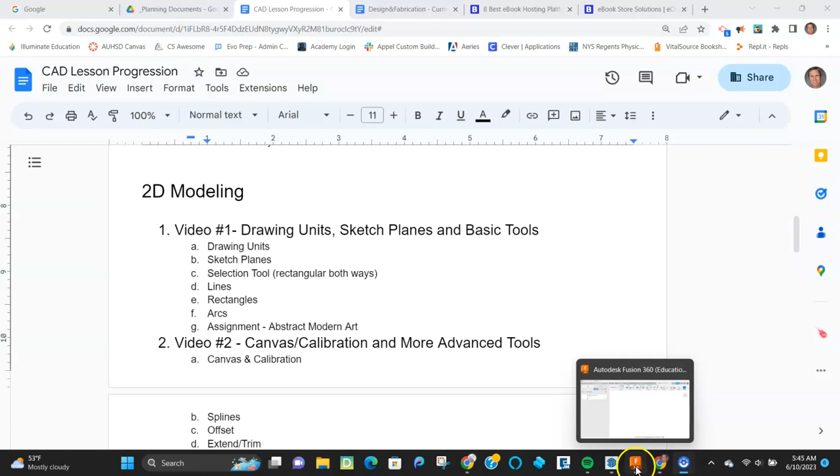All right, this video is going to go through the basics of drafting in two-dimensional sketches with Fusion 360.

One of the first things you're going to do is make sure you've checked your units. You can see that over on the left-hand side. You can toggle them between whatever you want, and change them at different times, but it's a good idea to have them in the units you want to start with. So I'm in my design space with my units, and I have the ability to adjust them now or later if I want. For the most part, we'll be working in inches or feet.

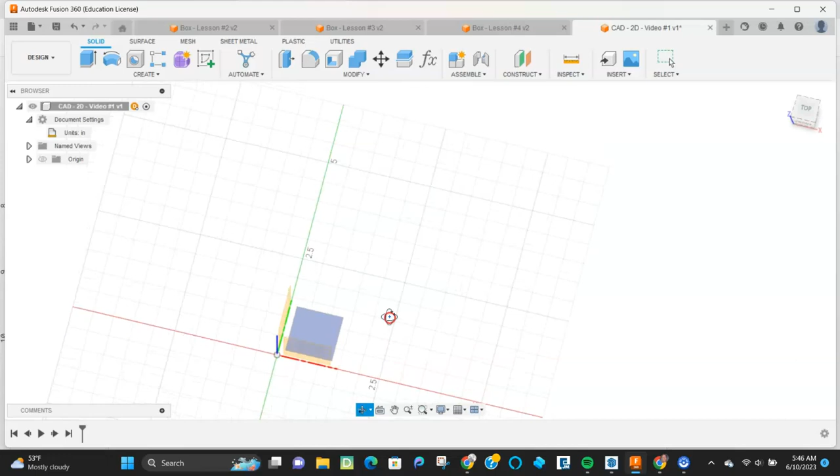Now what I want to do is actually create a sketch. I need to determine which plane I want my sketch to live on. I'm going to select the plane that pops up, and Fusion will orient my screen to a top-down view on that plane.

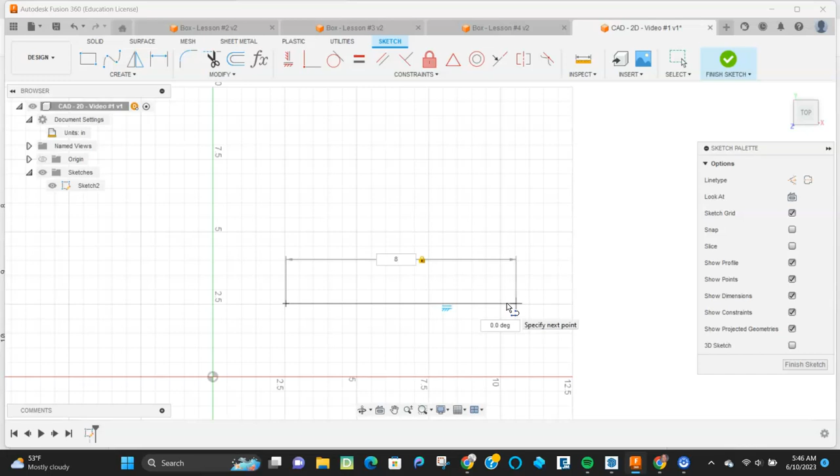So I'm going to start by creating a simple line. You can see as I pick a starting point, I can drag out and rotate up. I can also specify a distance by typing it in, and specify a degree by hitting tab and typing that in as well. That's an easy way to start with basic line work by clicking and dragging, and if you want to specify distances, you can do that too. So I have a line that's 8 inches long and parallel to my bottom axis.

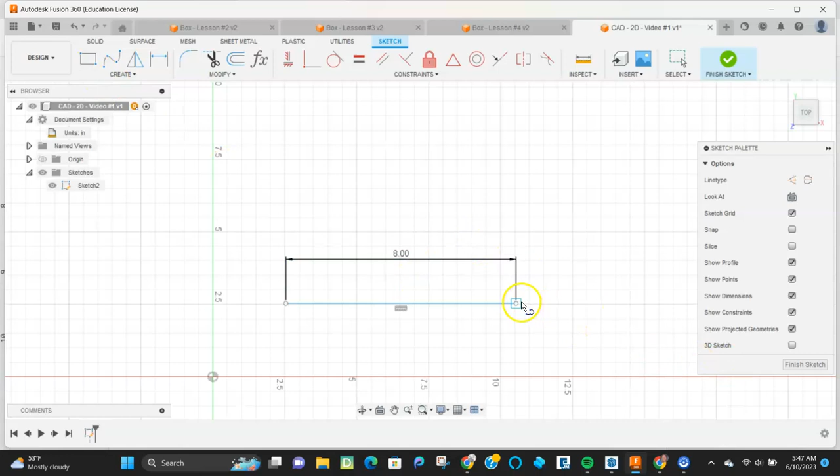I can create another line, make the distance that I want, and change the angle. So now if I have 45 degrees, it'll lock in that dimension or angle, and then I can drag out or type in the number that I want.

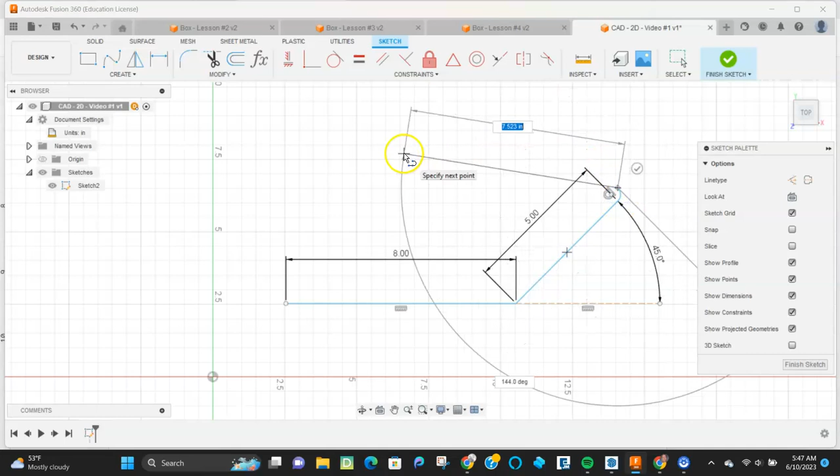So I have two lines now that are joined together. I can add more lines and make really any shape I want just using a simple line tool. You'll see it snaps to the endpoint of that first line, that's important if you want those to be joined. You want that little square to show up, which shows it will actually join those lines at the same point when you put them together.

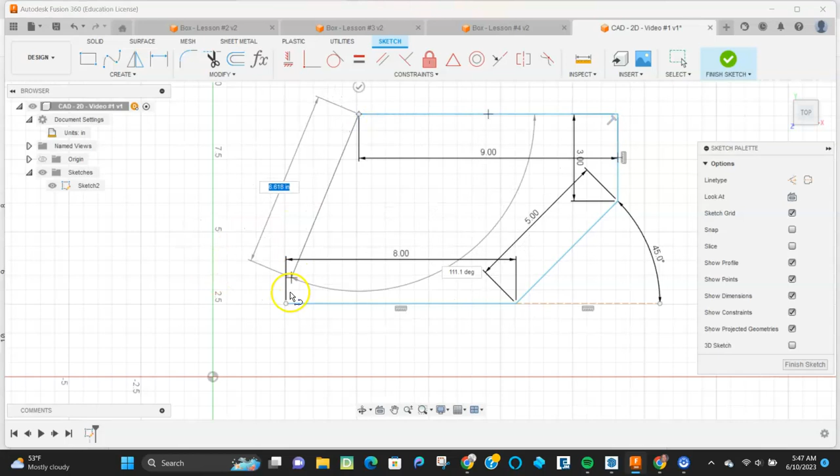So just finishing up my rough sketch here. There's no real rhyme or reason to what I'm drawing, I'm just looking at how I can make different lines in different spaces. As I hover over spots, I have a midpoint shown by a dotted line, and an endpoint. If I hover over it and then move, I'll be able to snap things to midpoints or endpoints pretty easily.

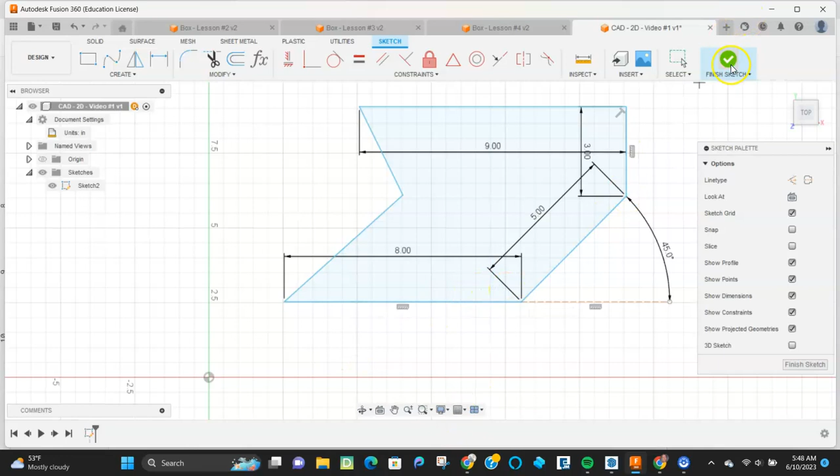Once I've completed and closed the shape, you can see that it shades it in, and then I hit Finish Sketch, and I can see that my sketch showed up there as Sketch 2. I can toggle the eyeballs to show or not show it down the left side.

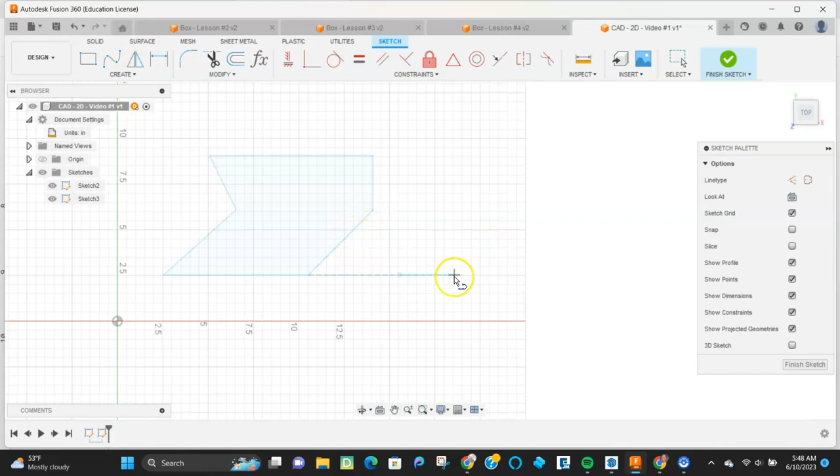I can make another sketch. I'm going to click the same sketch plane and move over a little bit to get myself more room. I'm going to do something similar where I make a shape, but specify the dimensions after the fact. You can see as I hover over my first shape, it'll start to draw lines to make things collinear to an endpoint or midpoint. So I'm just roughing out the same idea as on the left-hand side, much quicker because I didn't specify any dimensions or lengths.

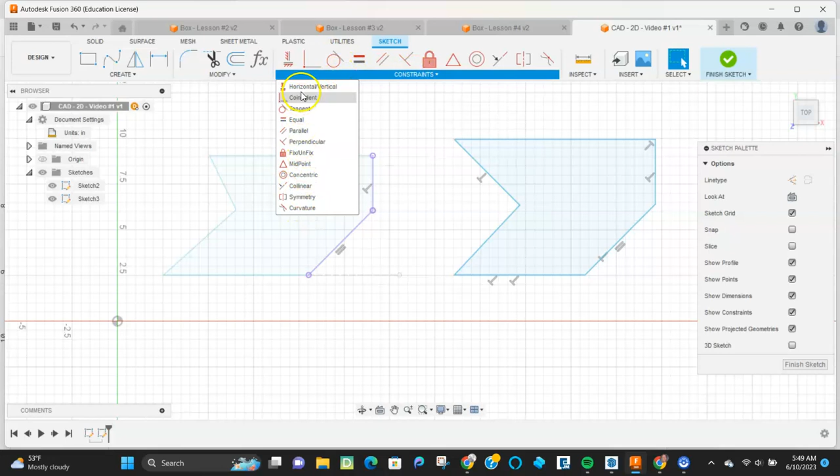What I'll do next is go back through and specify what those dimensions are. You have these constraints at the top that you can use to make sure things are parallel, coincident, or tangent. We're not going to mess with a lot of those right now—we're going to focus on the dimensions.

So we hit the dimensions icon at the top, and you can see if I try to redimension something I've already typed a value for, it over-constrains it. Whereas on this one, since I didn't set a specific length, I can now make it what I want it to be, so I can adjust it after the fact.

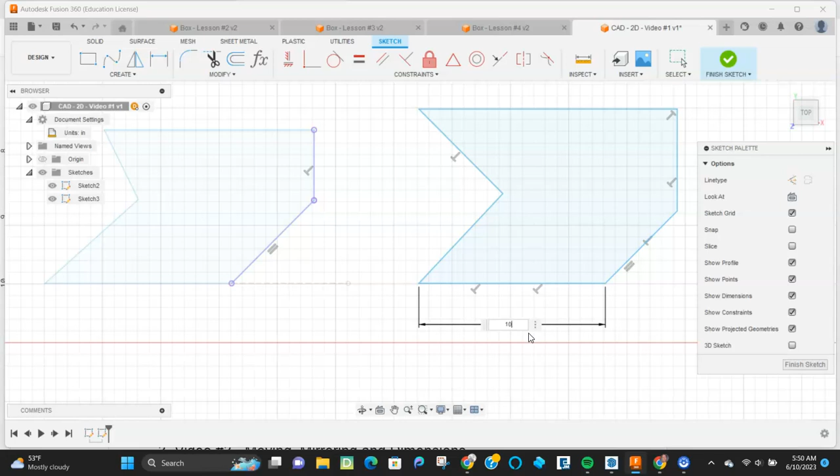So once you've typed in a line to be 8 inches, you can't change it with the dimension tool because you've already constrained that value. But I can pull out as many dimensions as I want, and I can start to specify my length here to be whatever I want it to be.

Just using the dimension tool, it stays active as long as I'm using it, and I can pull those out. Depending on the diagonals and which direction you pull them out, it will specify either the height or the length, and there are different instances where you'll want to do it different ways. You just play around with how you drag it out, and you'll see how those dimensions start to be created.

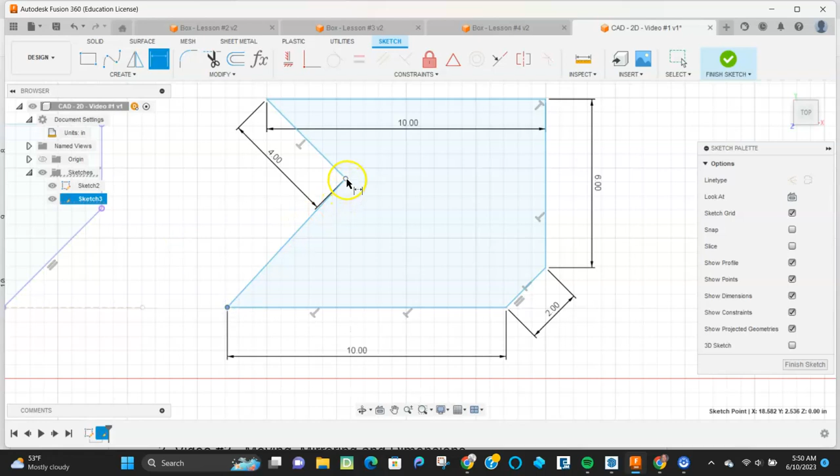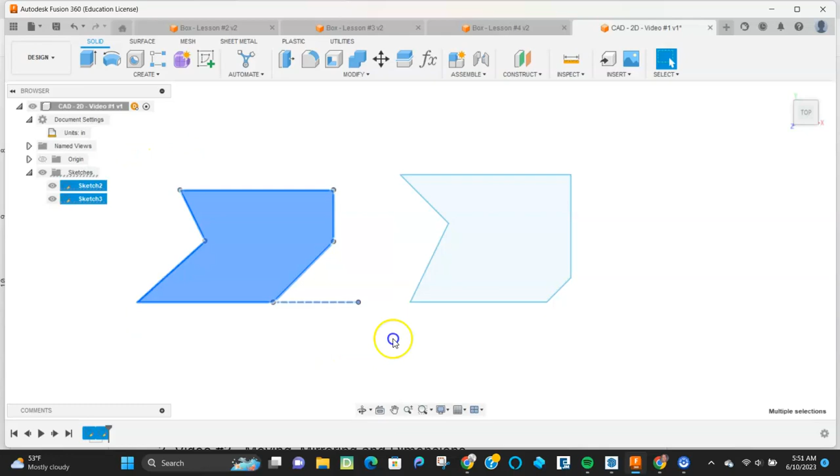We're going to talk about how we select things now. So I'm going to drag and go down to the right—this is my selection box. You'll see different colors depending on direction. If I drag and go up, it will select anything it's touching. If I go down to the right, it'll select anything it actually captures the whole thing.

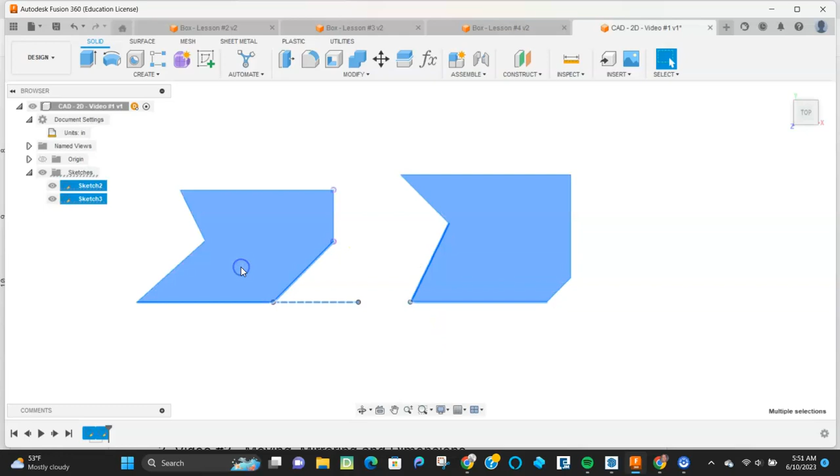So there are different options when I want to grab the whole thing. If I just want part of it, I go from the bottom right to the upper left. If I want to make sure I just grab one part, I go from the upper left to the bottom right. So the direction in which I drag is important for selecting different shapes as I go through it.

Okay, so we've made a couple sketches. We're going to look at some different tools now. Besides a line, we have a rectangle, and we have three different types of rectangles that we can draw.

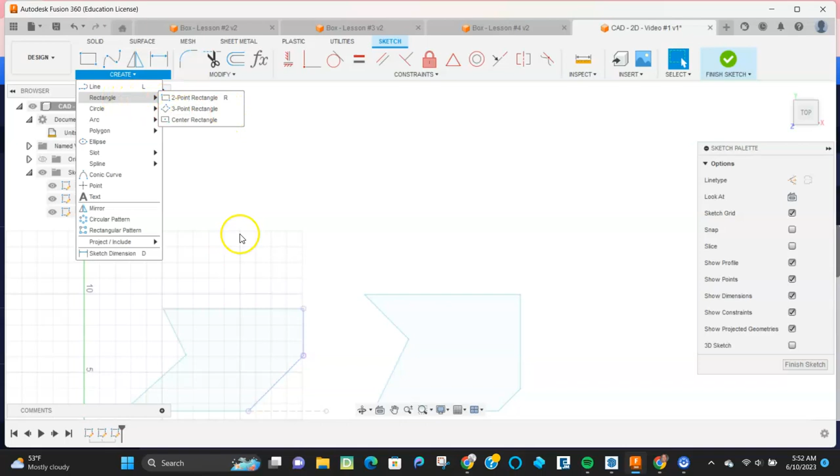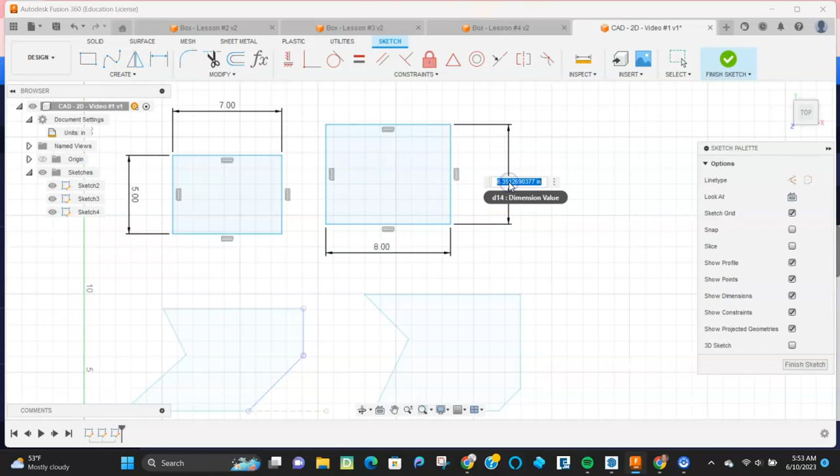We can have our standard rectangle where I just specify a point and then specify the other corner point, and I can drag it out with the dimensions to create a rectangle. I can make multiple rectangles that way—it's an easy way to create one. I can dimension those if I don't specify a value, and start to make my rectangle into whatever shape I want with my dimension tool.

I can also create a rectangle by making a center point. So if I know where the center point needs to be, I pick one point and basically pull out from that. You'll see in a second how I can make a rectangle from the center point.

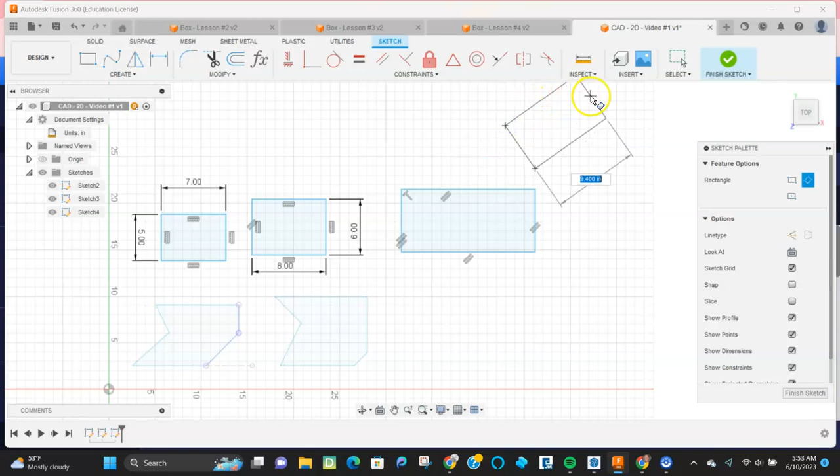This one allows me to make a rectangle with 3 points if I want something that is angled, and that's helpful if I have something that is not perpendicular up and down.

If I do a center point rectangle, here we go, this one—I pull out from the middle, and I can then specify the width and the length to create a center point rectangle. And then if I want to, I can dimension that to be whatever I need it to be from there.

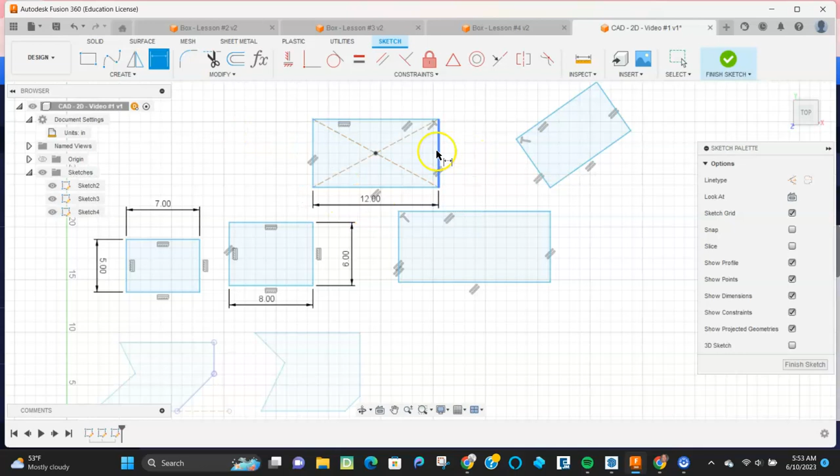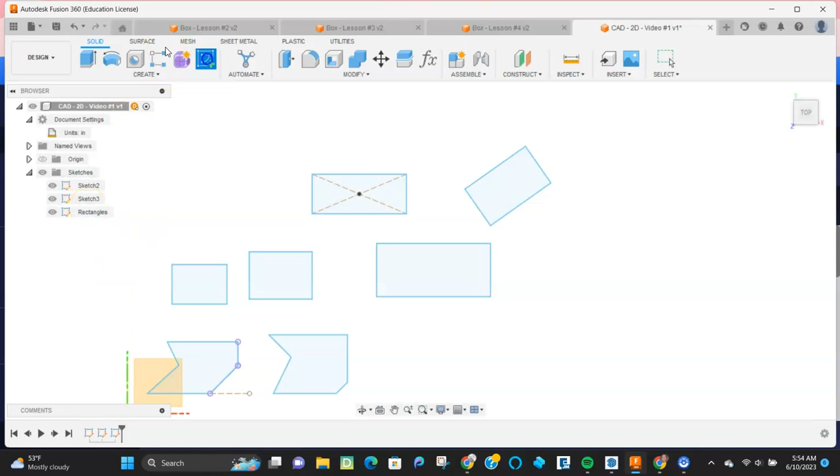All right, so I finished that sketch. You notice that I have different sketches in here. They're not labeled anything specific, but I can toggle them on and off, and then I can go back and either edit or rename them to be something easier to remember down the road. You have to remember that sometimes you're going to draw things and come back to it in a month and not remember what those things were for, so labeling them with an appropriate name is very helpful.

We're going to look at some of our circle options here. So I have a standard circle where I have a diameter that I set and I pull out from the middle. Then I can specify those and dimension them if I want to down the road by pulling out to some random distance and then specifying that value. Once I set that dimension, it'll adjust what the circle looks like.

I can make different variations of circles. You can play around with them all. There's different instances where you want to use them. I have one from a side, right, and then I'm going to pull out a diameter from the side. Again, if I don't know where the center point needs to be, but I know where the side needs to be, I have a rectangle that I can then use to create a circle.

So let's say I have a circle, I have two sides, and I want it to be in the middle there. I can pull that out from the middle, and then I can start to join shapes that way. That again is snapping to the midpoint, and I pull out a circle from the midpoint of that rectangle.

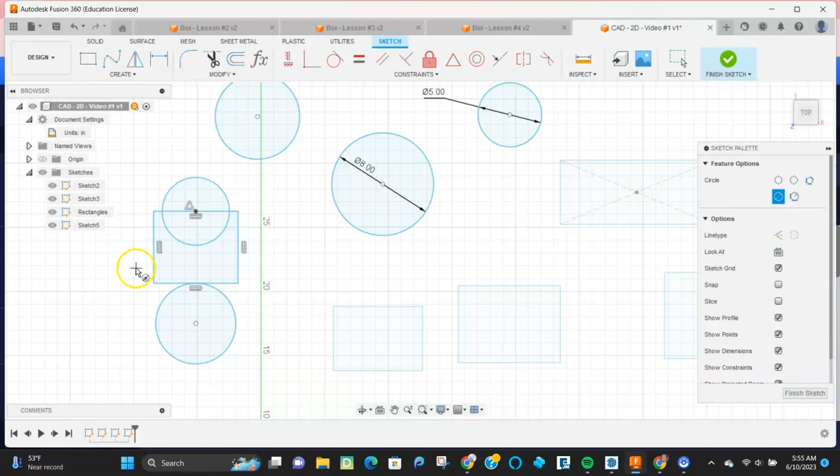And then I can rename that sketch to be called circles so that it is clear when I come back and look at it down the road. All right, we'll make another sketch. Again, same sketch plane, I'm not going to get into three-dimensional space here. We're going to look at what we can do with an arc.

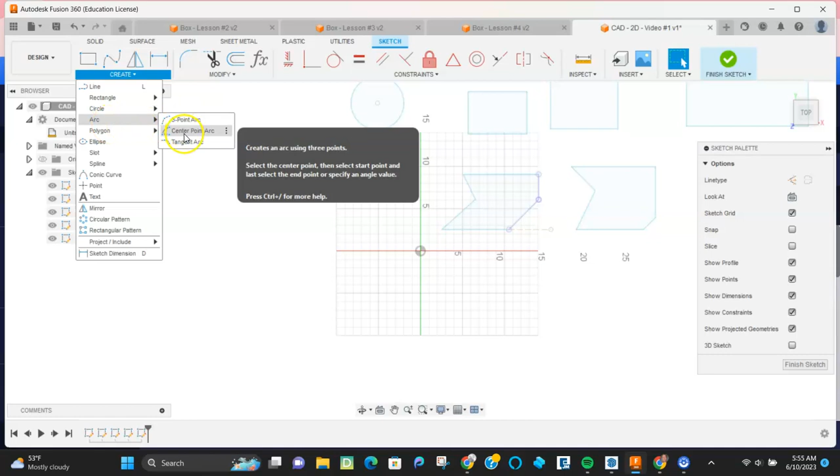Right, so I have an arc. I have 3 points that I can set, the two sides, and then I basically will pull up from there what I want that radius to be. Again, I don't necessarily know where the center point is with that, but I can pull out again, with those two set sides and then put those pieces in with my arc tool.

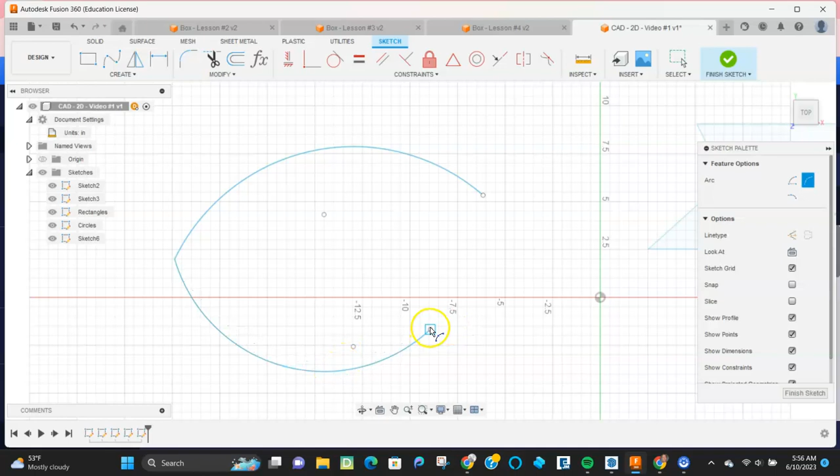There's another arc that I'm pulling off, and it's joined at the end point there. And then finally, I have that last piece, and I've made a shape using three arcs. Then again, it's closed because I've completed my shape, where it's a bound shape at this point.

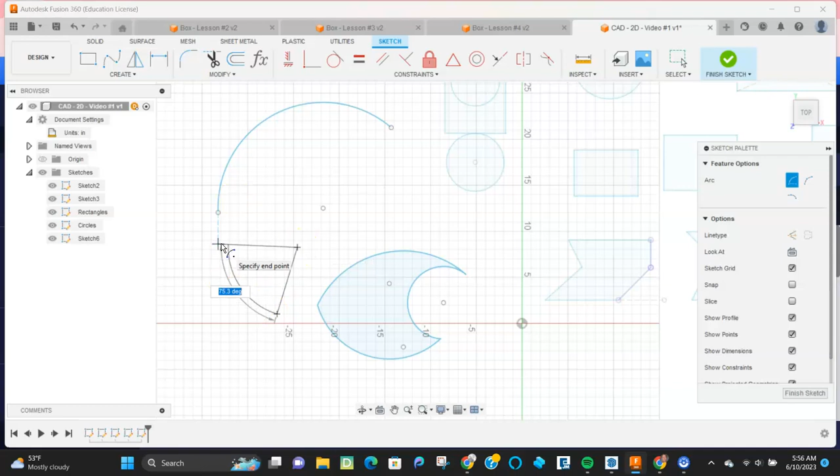This is where I have an arc, I have a radius, and I have an angle that I'm pulling it. So I pull that out, and then if I'm looking at like a sector of a circle, I can pull out and rotate that value to go from there.

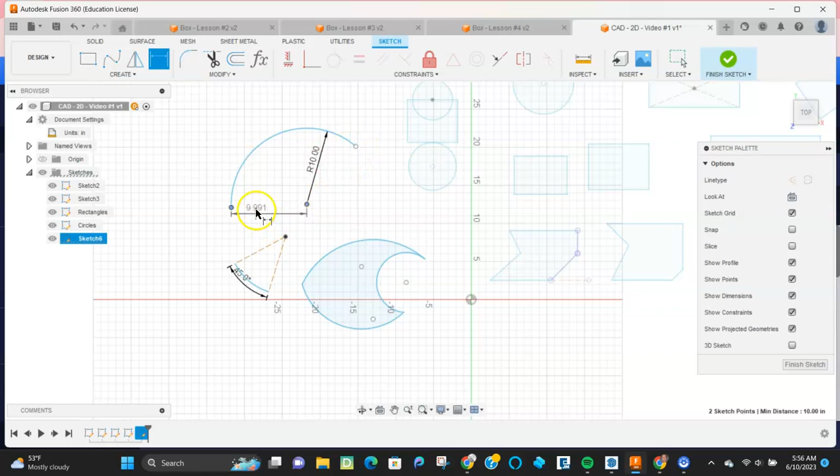Then if I want to dimension it, right, I'll pull out and I'll basically be setting the radius for my arc if I haven't set it already. Again, once I've set that radius, I can't change it again because I've already constrained that value.

All right, so one thing to notice too is we have these dashed lines, which are construction lines. They're not actual lines that we can pull, but they help us show how the actual shape was constructed. So center point and then the arc. All right, that's it.